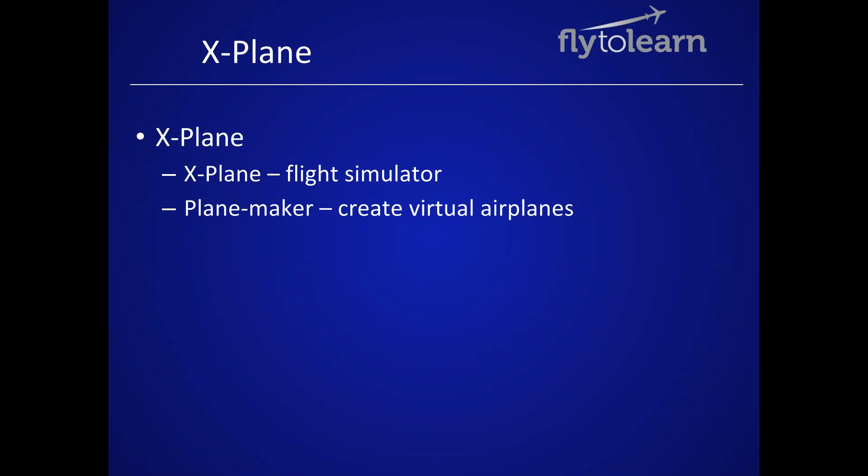In the curriculum itself, there's 10 lessons. The first 6 lessons are more science themed - it's more about how an airplane flies, the science of flight. The last 4 are more of the engineering theme, and it gets to practicing all the STEM skills - I know STEM has gotten way overused, STEM, STEAM, all that stuff.

We've been doing this since 2012, and I started teaching engineering at my school back in 1989 - I've been there 28 years. Anyways, data collection, data analysis, engineering trade-offs - you're going to see we can graph with this, so you really can collect some cool stuff. Students design an airplane in the final lesson, and that's going to get back to the competition for those involved in the GAMA competition.

What you generally do on a lesson is introduce what you're going to cover that day, maybe show a takeoff video, hand out to students the worksheets. It does have worksheets to fill out with directions of what they're supposed to do. Have the kids read it. There's been 28 iterations of those worksheets, so we've covered about everything on there.

A teacher tip: if a student says to me, what do I do next? I will ask them, well, show me in the directions where you don't understand, where it confuses you. And almost always they would go back, read the directions, and know, oh, this is what I do. So it encourages them to read.

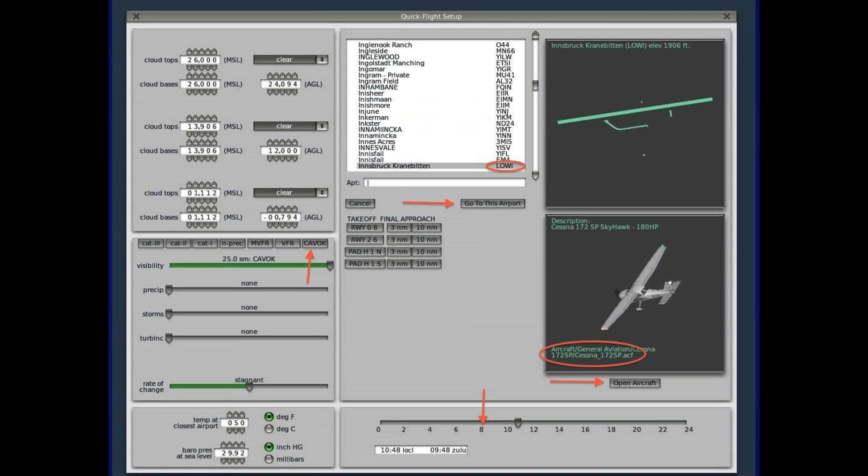It's teaching you and the kids, or you and the teacher depending if you're a student, how to use the software, where to go, where to click. And it's very specific, exactly step by step to do it. But after the first lesson, people really pick it up pretty quick.

But you can also tell we were trying to teach science and engineering, because what we really get into in the theme of this lesson is potential and kinetic energy. Think of potential energy as the top of the hill, kinetic energy is your bike after it's been rolling down the hill. In an airplane, potential energy is altitude, airspeed is kinetic energy. What you have the kids do is fly the plane level, then have them just draw out a line for the attitude indicator, altimeter, and airspeed indicator.

Just mark it, then point the nose down, do it again, point the nose down, see what it does to your airspeed. Then point the nose up, what does it do to these instruments? So if you're flying the airplane, the way you can do this is you can start off already taken off. I'll show you this right now. I'll come back here, so I can go back to, and it tells you exactly how to do this: do quick flight setup, go final approach.

So here I am in the airplane. If I point the nose down, watch what my airspeed starts to get. It probably might look choppy on the internet, but my airspeed is gaining, but I'm losing altitude. By this point in the lessons, what are the different instruments?

This is your airspeed, this is your artificial horizon indicator. More brown means you're going to the ground, blue is sky. This is your altitude, shorthand is in thousands of feet, longhand is in hundreds of feet. Okay, so watch what happens now.

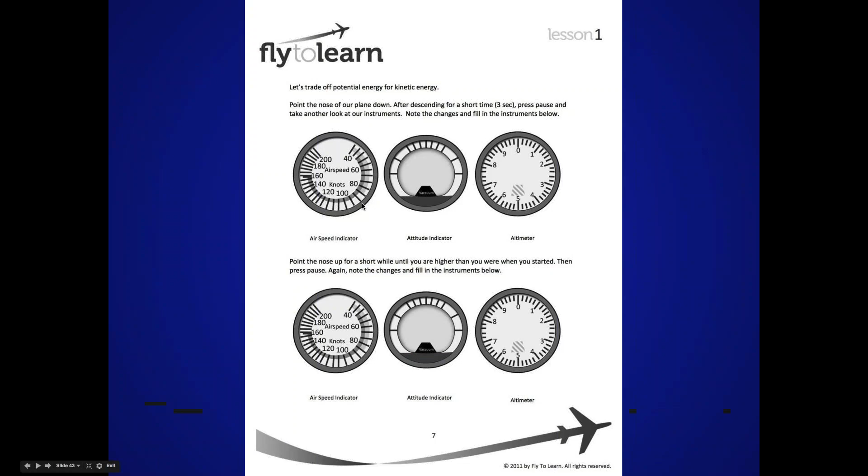All right, now let's go on to the next one, Lesson 2. What I'm trying to do is get through the science lessons today, and then we'll go into the engineering lessons Wednesday. That'll help you learn the engineering side of this and help you for the competition. So in this one, it's 'may a force be with you' - you've got force, weight, introductions, and things.

Again, this time, click on these areas - it's very specific on what you're going to click on. So if the kids will read it, I really encourage teachers to ask the kids to point out to you on the questions where they don't understand it, and you'll find they end up reading it most of the time. Another teacher I teach with will ask them to have another student show them, but usually once they start following, they do pretty well.

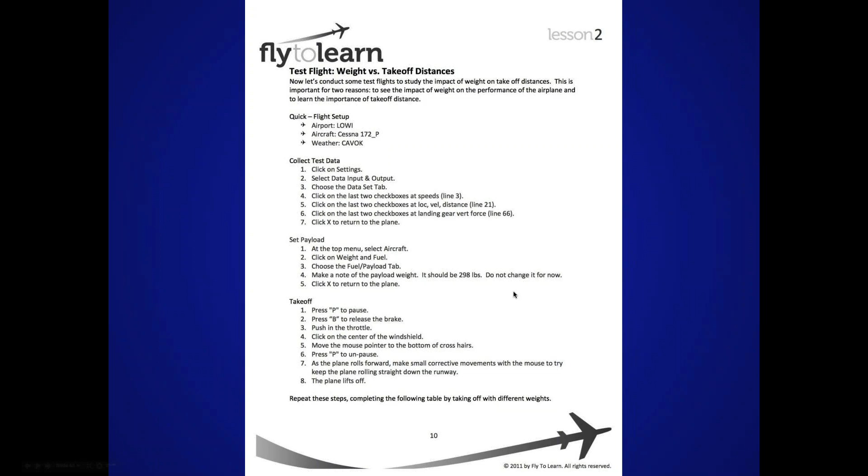Now let's talk about how we do this. If you go in your airplane, let me go in the menu. If you click on aircraft, and you do weight and fuel, you'll find this. Let me bring the window over so you can see it. So if I go under aircraft, weight and fuel, I can change the weight and fuel of the airplane, and you can change this weight. We're going to have them change it to 300 pounds, 600 pounds, and 900 pounds.

Now, in reality, you would never change the payload weight by 900 pounds in this aircraft - you would crash the airplane. But it's a simulator, so if it crashes, it's not the end of the world. We also change the data - we can measure things, that's what's so powerful about this software: speeds, distance traveled, landing gear forces. You get both graphical and cockpit display.

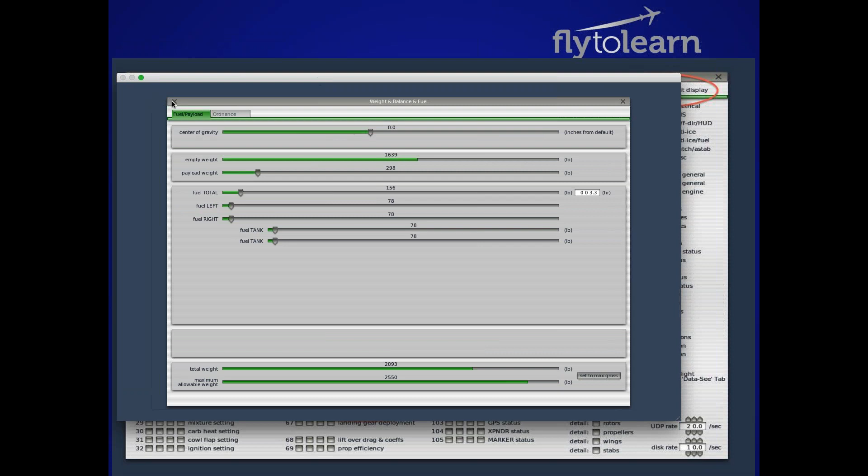Does that make sense? So let me show you how we get there, and you're going to see why we do this in a minute. I'm going to bring the real software back so you can see it. If I go under Settings, and I do Data Input Output, I can set these things. In this case, I've got speeds, distance traveled, and landing gear vertical forces. And why do we do that, you might ask?

All right, make sure everybody can get to this. If you've got the program, remember, go under... let me bring it back over for you. Remember, the menu doesn't always show - go under Settings, and if the menu isn't up, move your cursor and it'll pop up. Settings, Data Input Output: speeds, distance traveled, landing gear forces. But you can measure any of these things - 131 things you can measure. You don't really need these two checked off, but you do need graphical and cockpit display.

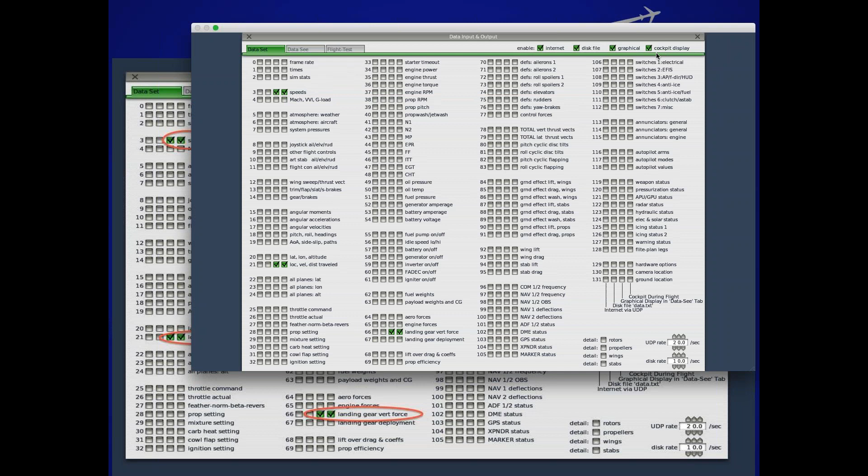Because let me show you what we've got. When you're flying this airplane, that information is a snapshot right there. There's my landing gear forces, which, because it's off the ground, there's no load on the landing gear - they're just hanging out there. The weight of the airplane is not going through the landing gear into the ground, and the ground pushing back - that's how you get those vertical forces. Up in the air, it's got nothing to touch, so not surprisingly, it's 0, 0. Here's the true airspeed.

True airspeed versus indicated airspeed—the instruments on the airplane show indicated, but just use true, it doesn't matter what units you use. Just be consistent: if you're using indicated, stick with it, or use V true. I think you're better off with V true. And there's distances traveled as well.

Don't worry about these other numbers, we're going to graph that in a minute. So I'm going to go back to data input output. Once I started flying, look at this.

I'm going to bring up this graph. Now, it was sitting on the runway for a while. Well, we took off in the air, so let me take off from the ground here real quick.

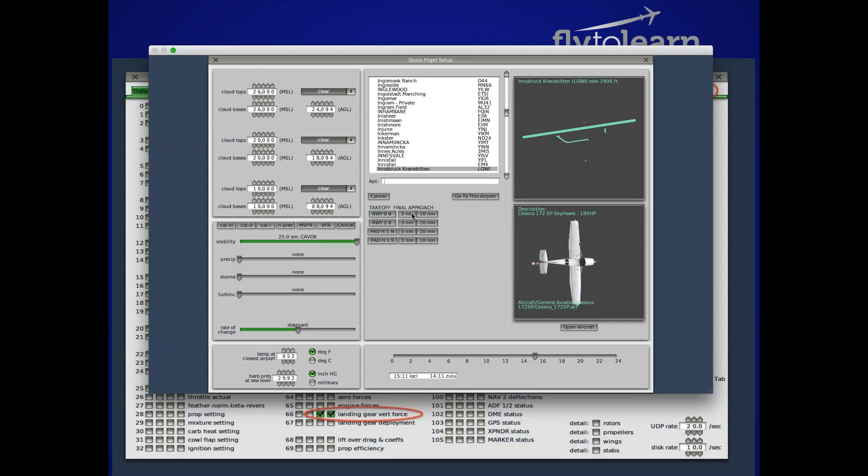While we do that, let's go to quick flight setup again. We're going to go to runway—we're just going to do final approach. Actually, let's do takeoff instead of final approach. Here it is, I'm going to take off here real quick.

Pause it, brake off, push my throttle in. Back up—I am collecting this data. I've set this to collect, so I am collecting data right now. By default it's collecting some of the same pieces of data.

You can have your students collect whatever you'd like. So here we go, I just want you to see how this graphs and why this is powerful—you can do real science experiments with this, and real engineering analysis.

I'm taking off quickly just to show you what's happening. All right, let's look outside the airplane, and let me make sure I took off.

Okay, notice right now some of the landing gear is still on the ground, and some of it—the nose—has come off. This left gear has come off, but not all of it. So let's keep flying it.

I'm going to unpause. Now I'd be willing to bet I'm off the ground. And now we'll look—there I am. All right, let's go ahead and look at my graph this time.

There's a lot of curly lines, and these two lines in particular are kind of squirrely. So let's do this: we'll get rid of some of these checks, and I'll show you all again how to do this—don't worry if you're like 'oh my gosh.' Go all the way down to, and it says it right in the handouts, V true miles per hour—leave that. Turn all this off, notice I'm getting rid of most of these lines.

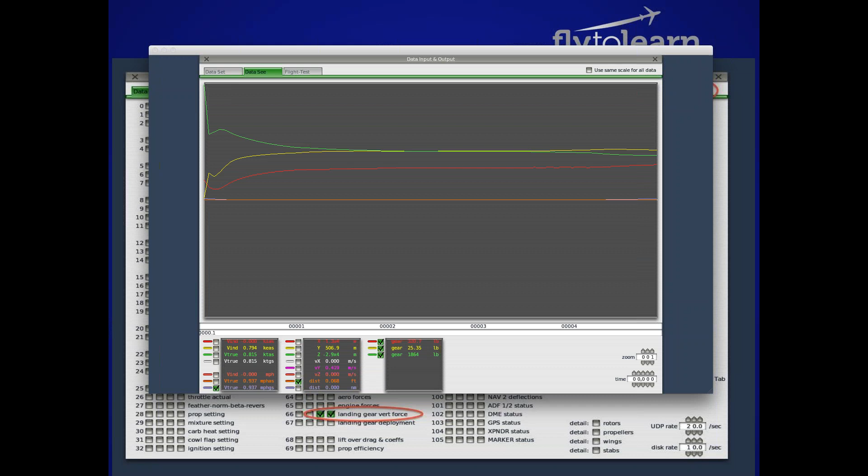Someone asked, do you have the kids try to get up as quickly as possible, or try to be consistent? I try to be consistent. The way I get them to fly consistently is I have them hold it a certain way - let me change to cockpit view.

I'm going to unpause it here so you can see it. I have them always take off pointed right underneath that cross there. I try to keep it as close as I can.

Then you can talk to them about how hard it is to be a test pilot, that he or she has to be able to fly consistently, exactly the same way. There you go. This way you get a standard.

What you'll find is there are times when the plane barely takes off. Put 900 pounds in this airplane, it'll take off, but it'll be close towards the end of the runway. Later, we're going to change the aspect ratio - that's the ratio between the wingspan divided by the width of the wing. The low aspect ratio airplane takes off literally at the end of the runway.

So we're going to look for trends. Any other questions?

I'll just show you one more time. Here we go. We did that with data input output. We set it - you don't really need these two up here, the disk file. The graphic and cockpit, this is what shows up in your cockpit. This graphs it for you, so you can see it here.

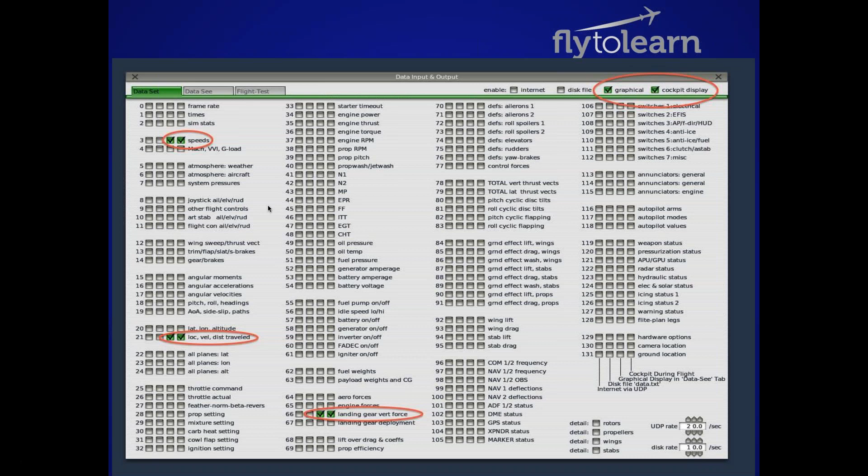So here's our airplane. If you're not collecting any data, there's no mark on the screen. Here it is when we're collecting data. So when you're in the cockpit, if you have cockpit unchecked under data collection, you don't see anything. Cockpit checked, it does, and you can change it. This is all the different parameters.

I've hit the W key so I can see outside my airplane. As I was showing you earlier, this has all the lines, though you can uncheck them, like in this case right down here. But with all the lines checked, this is still the landing gear here - that's a lot of information, so I uncheck these.

See, they're all unchecked except for true distance traveled. Right at this point here, where all the landing gear goes to 0, we can look at V true and distance traveled.

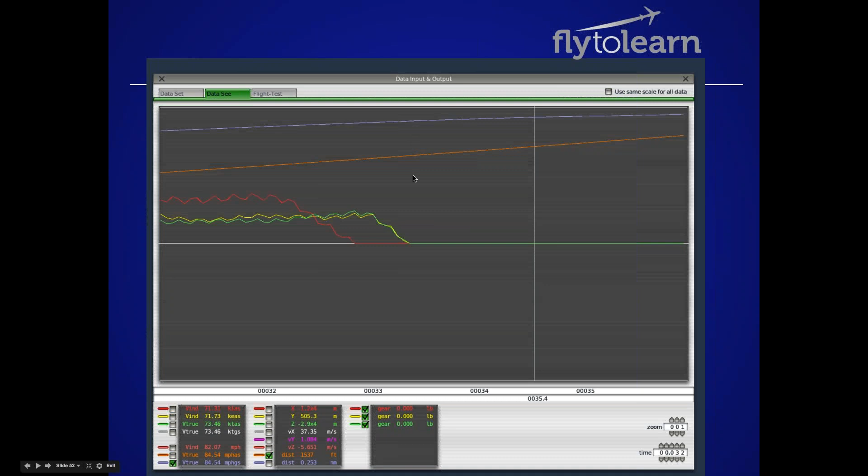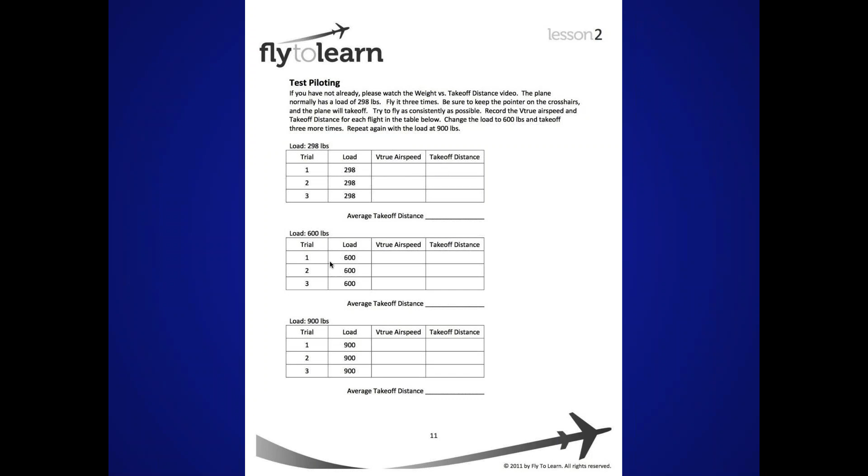So in that second lesson, we say, what's the true airspeed and the takeoff distance when it's a 298 load, then 600 - it's hard to get right at 600, so it might be at 601. 298 is the default value, that's why we use that. And then 900, and you're taking an average of each of these, then you plot a graph. That, by the way, explains why airports have to be bigger with bigger airplanes, as a general rule.

All right, any other questions so far?

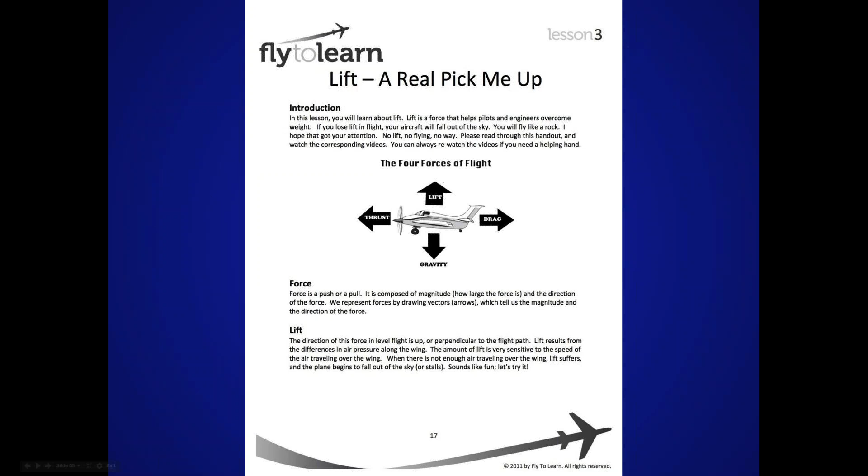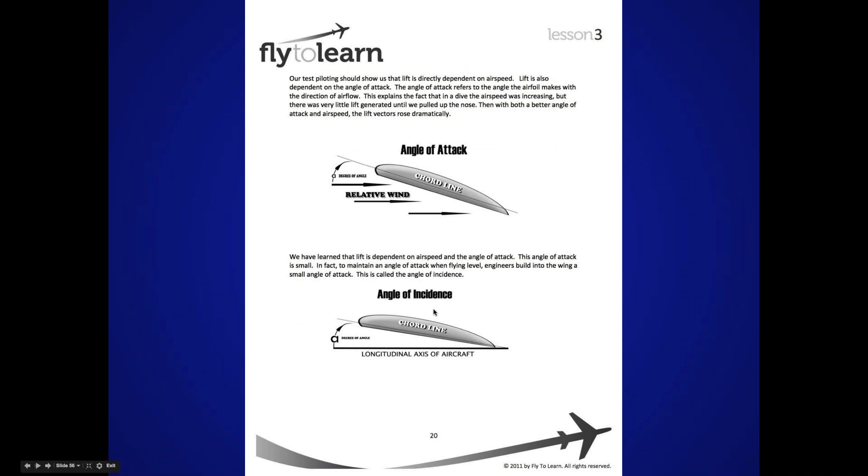Okay, lift - now we get into why an airplane flies. It's a combination of both angle of attack and airspeed. We build that in, so angles that tilt the wing up. If you're saying, well, how come I can fly level in an airplane - we build an angle of incidence. The wing actually has a built-in angle of attack. There are two reasons for this that are commonly used to explain it: Bernoulli's principle and Newton's third law.

Bernoulli's principle is that as a gas or liquid's airspeed is increased, the pressure is lowered. Newton's third law is basically that for every action, there's an equal and opposite reaction.

In the first case, there's an idea that the air has to travel a greater distance at the same time as the air below, so this air must be traveling faster. That creates low pressure, and the wing goes up. In this scenario, we're saying air hitting the bottom results in lift going the opposite direction, like a kite. You can go to any airport and hangar and pilots will argue which one's true.

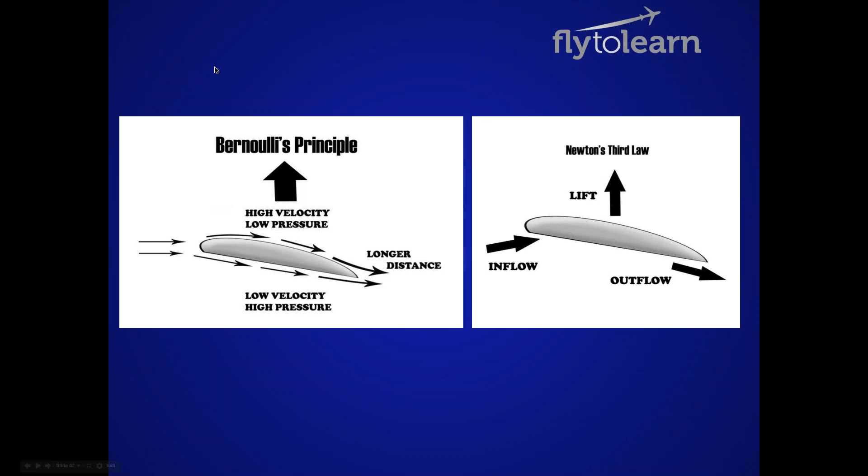It's probably a combination of both. Now, what we're less interested in is what's causing that low pressure; we know it's there, and we're interested in lift. So watch this, come back with the airplane.

I'm going to go back to my quick flight setup, final approach again, and watch this airplane. I'm going to pause it and hit the slash key, right underneath your question mark. Then let's look outside, I hit the A key. W and A, practice that. Hitting slash a second, third, fourth time goes back to normal.

When I go to fly this, I'm going to climb. I've got a great angle of attack, but low airspeed, so look what my lift's doing. Now if I point the nose straight down, I get more lift, but it's only when I add an angle of attack that I get a lot of lift. This demonstrates that lift is a function of both things.

This also explains to kids why you can be going fast, but if you've got a really high angle of attack, you're going to lose airspeed, because as you gain altitude, you lose kinetic energy, and you can stall because your airspeed gets too low. And if you're going fast, you still have to have an angle of attack.

All right, now let's go back over here. So that's with the lift. I'm going to move a little bit faster. Drag. Drag opposes your movement through the air.

I think the best analogy for the kids is if they've ever been in the lake or an ocean, they run alongside the water, they can run pretty fast. If they run their waist through it, all right, so you have force and drag. So as the airplane moves forward, drag impedes the movement because you're moving molecules out of the way, just like water. So if you run around a beach or a lake and the water's up to your waist, it's a lot harder.

That's a measurement of drag. There's two types of drag we get into: induced and parasitic. Parasitic is put your hand out the window, run through a lake, that's parasitic drag, it's based on your shape. Induced is the drag that's caused by lift.

And then when we talk about drag we talk about flaps, and you extend the flaps on an airplane, which is really kind of cool. What that does is it adds more drag and more lift, so you can land the plane at a slower speed. And so they'll practice flying with flaps.

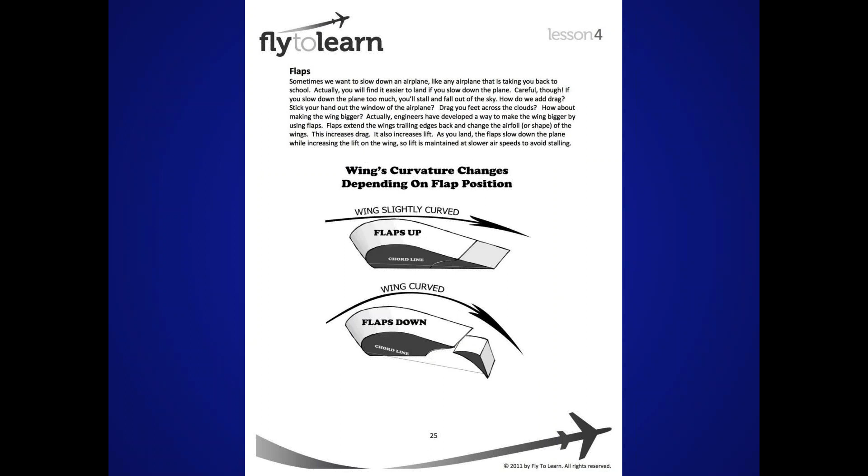And we actually end up using a different airplane. Let me show you the airplane you use when you do it. I'll show you where the flaps are so when you go to do it. All right, so let's go to settings, quick flight setup, open aircraft, general aviation, open.

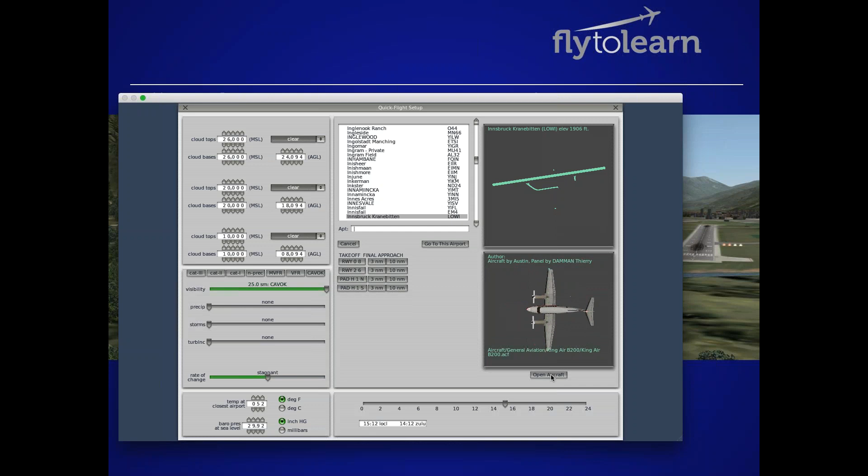So there it is, right? It's a King Air, you're going to fly that. So let's go ahead and fly on a final approach. Here it is as you're coming in, I'm going to pause it. Because it might be hard for you to see it, the flaps are this handle right here, and those are fully extended flaps. And when you pull this down, the landing gear up or down. So the landing gear, those red lights are telling the landing gear is down, and the flaps. And the kids then record...

When you put the flaps down, what does that do to my airspeed? As you can tell, we're getting ready to practice landing.

And if you look at the plane, if you go outside the airplane, you can actually see the flaps extend if I unpause this. Let me see if I pause it. Get my white square, it's right down there. See, now you can see, not real clearly, but the flaps actually kick out, like in a real airplane. That's some of the things you hear in the noise whenever you go to land on an airliner, you hear that chung, chung, chung, that loud noise as it comes out.

And the bigger noise is probably the air brakes, and they are trying to stop all the lift on the wings whatsoever. You don't see those come out until the airplane's nearly either on the ground or almost on the ground, because that plane is no longer flying when they put out air brakes. Any questions on that?

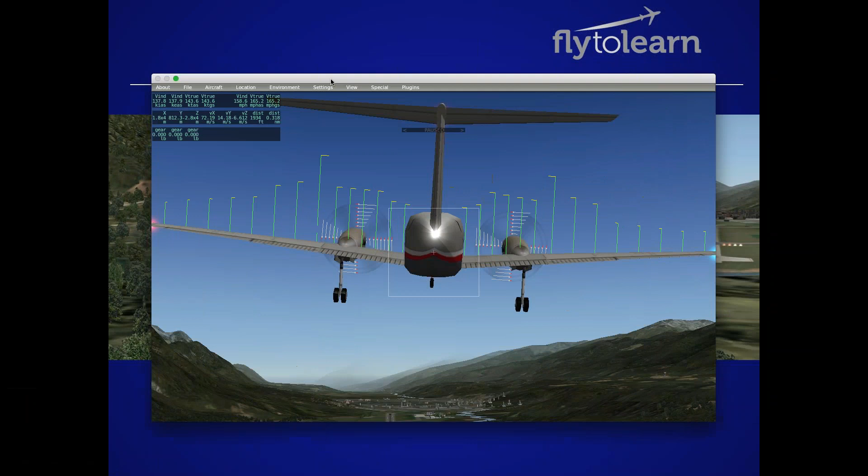All we did is, you're asking why. You can actually do this, and you can add drag as well, by the way. Let me bring up the airplane. There we have V-True and everything on the airplane. If I go to settings, data input and output, and change my data set, I can tell it I want drag as well as lift. So here's wing lift, here's wing drag, and you can do that.

Let's get rid of distance traveled and landing gear, since I know I'm up in the air when doing this. I might keep my airspeed up. There's my wing lift and my wing drag. Now if I want, I can freeze this flat and change those things. You've got to fly level because you're going to impact your lift, so you could use that as well.

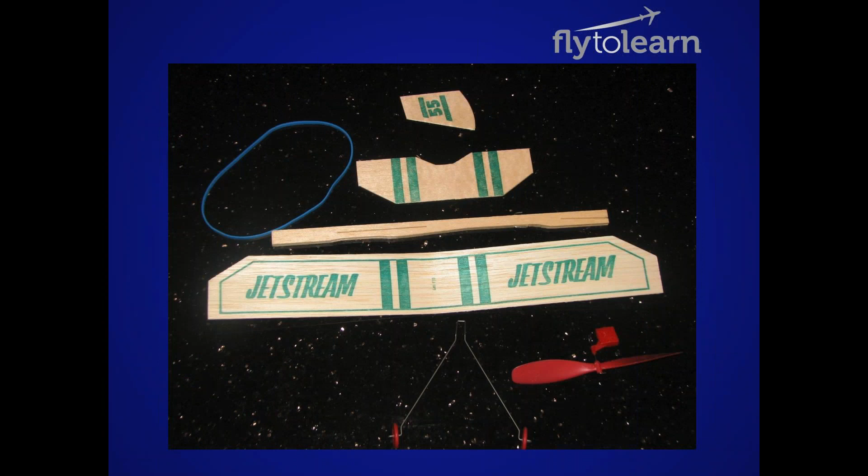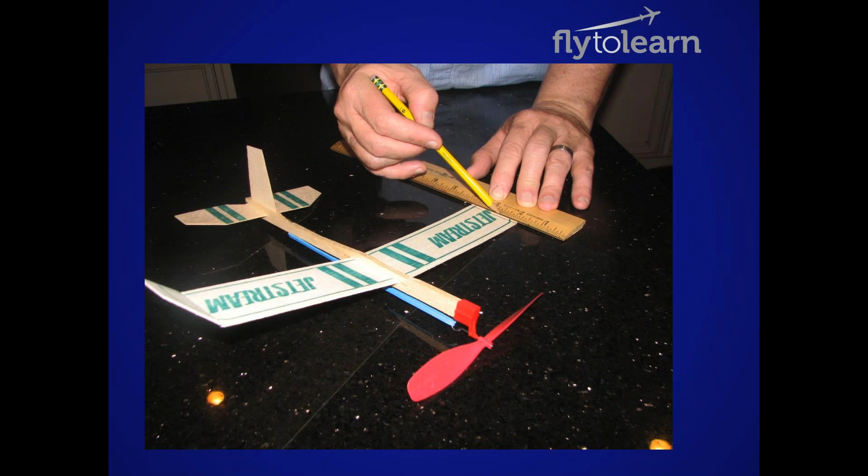Now, sometimes you've been playing on computers. I like to break it up, and you don't have to do this, it's totally optional, but I break it up with these cheap airplanes. Then we talk about putting it together and just flying it like that. Those will fly 2 seconds, 3 seconds, then we do things to improve it. We're going to replace this with a better rubber band, get rid of all the unnecessary weight. I actually ask the kids, what can we do to make this plane fly better?

Think about the 4 forces. What you see is they start talking, well, let's get rid of all the weight, let's get a bigger rubber band, which we call a big rubber motor. You can buy it by the pound. We talk to the kids about adding some dihedral to make the airplane more stable as we add this. Doing that, you can get 5 to 10 second flights.

And that is a great way to break it up if you want to go outside and fly some airplanes or go into a gym.

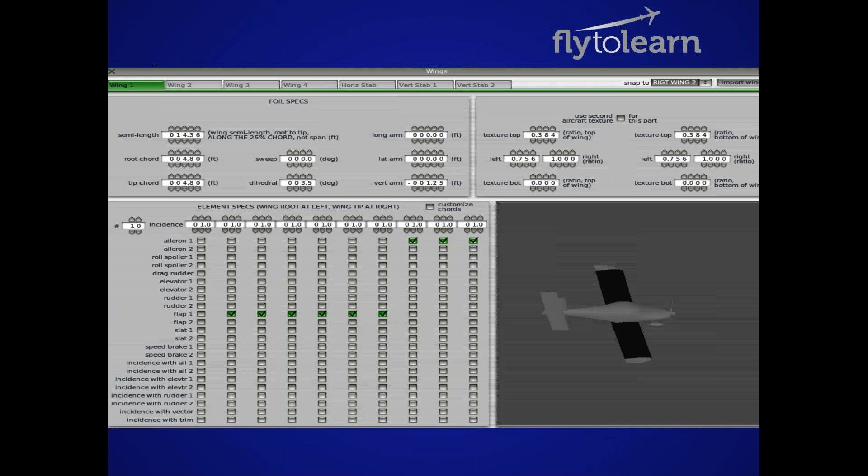I think we'll go ahead and pick up with that on the next lesson or the next webinar when we start up here, lesson 6. We'll go on to that. But I do want you to see something else before we go. I wanted you to catch this tonight too, so you get a sense of this. In Plane Maker, we can take an airplane. Stability, we'll pick that up next week, or excuse me, Wednesday. I do want to show you Plane Maker so you can see where we're going with all this, because right now, everything I've shown you, I will share with you in just a little bit where the videos are. Let me show you a little bit about Plane Maker so you can do it.

All right, so there's a program right where your X-Plane file is. It's called Plane Maker. Let me go ahead and jump out here, see if I can get out of it. Let me jump out here.

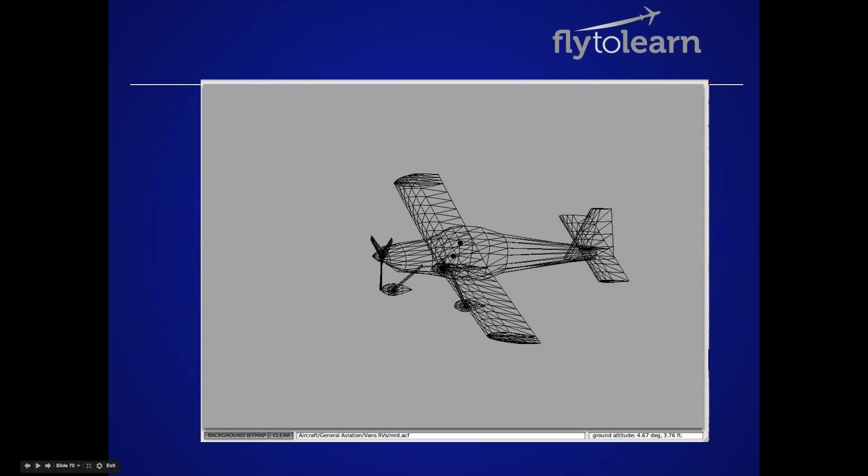So if I look it up, all right, I'm going to just pull up Plane Maker. Here it is. If I go into, and if I hit the space bar, it pulls up. If I change this wing, I can then fly it in X-Plane, and the plane will fly differently.

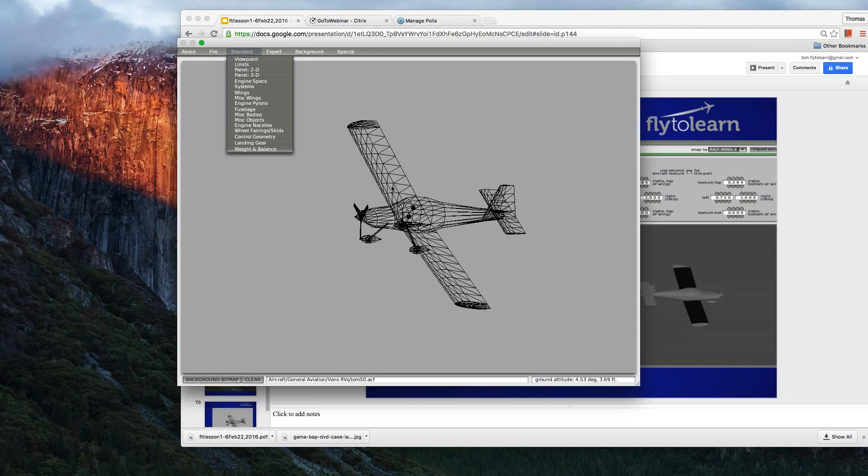We'll do that. We're really just going to focus on changing the wing. So if I make this wing like this, and then update the wing tips, I have all the menus to help you do that. So with the wing tips changed, the plane will fly differently.

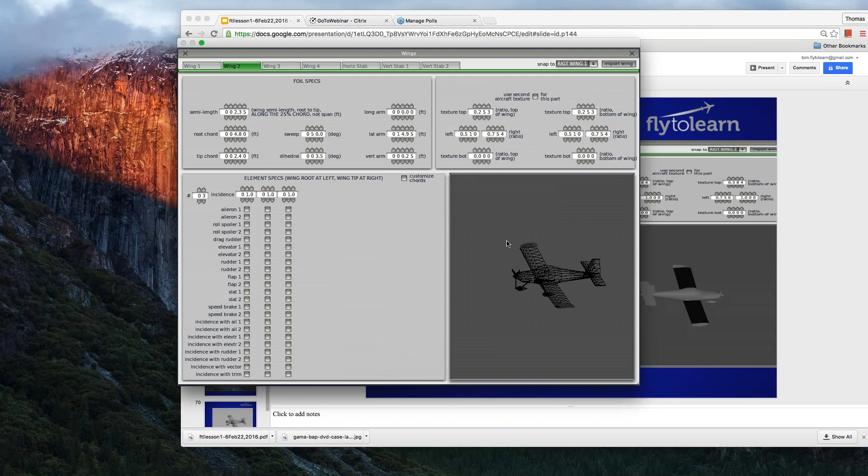All right, so that's what we're going to get into Wednesday. There's the airplane. When we go right into X-Plane and fly that airplane. I don't want to say that. Okay.

And the other thing we'll show you is just the aviation challenge. Now it'll be different. I'm not going to give you the actual details for the contest, but here's the shows, the aviation challenge. You take off and you fly and land. In the case that comes with the software, you take off and you land on a grass airstrip. It'll even tell you which way you're going. It's a combination, the score, you get a score at the end, and that score is a combination of what you carried divided by the time it took you and the amount of fuel you used.

All right? So those are the features we'll cover up with Wednesday's next video.

I will also show you, let's go here. I'll bring it up in Chrome here. Let's go up here. I'm going to go ahead and bring it up right now. In my lifetime, please. Okay, let me bring it over to you in a minute. Let's try it this way. Let's use Safari. Yes. All right.